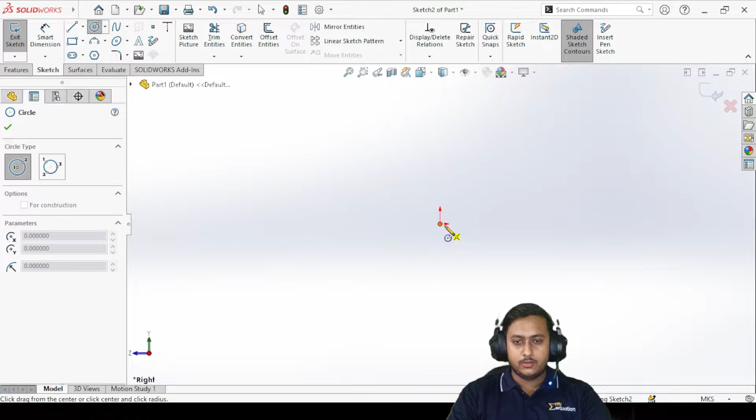So we can start from the right plane. And in this right plane, first of all, let's just start with the main axis for our crankshaft, the main shaft that is 0.035 radius, and over here we can just extrude it.

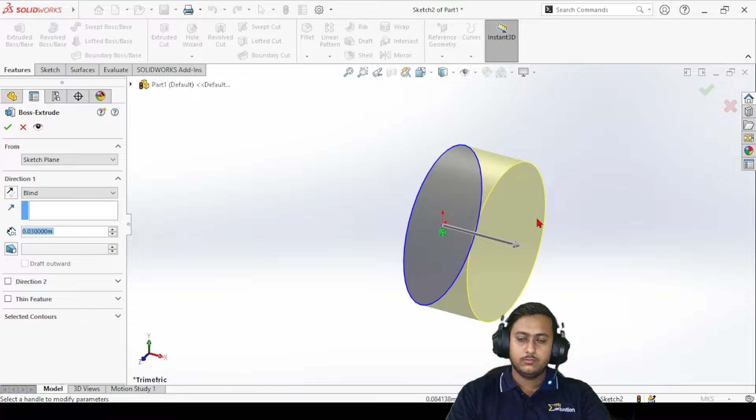I am using these dimensions because I've already calculated it according to the connecting rod which I made. Just go to your connecting rod and take dimensions from there, according to the connections between these two. So its thickness is something around 0.03. There you go, now you can just click on OK.

After this you can just start from here. Just see where the right plane is, yeah it's on this side. Actually in this image, now I'm just starting from this mid center, and I'm going to make this a right profile, and mirror it on the other side. As you can see, it is exactly similar to this side.

Instead of making all four of these separately, I'm just going to make these two, because these two are actually different, the smaller sides are on different sides on each side. That's why I'm going to make these two, and mirror them to the other side. So from here I'm starting.

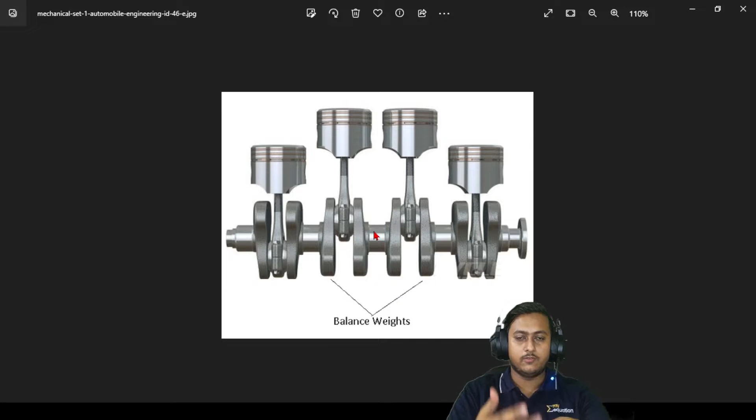You can start making it wherever you want, you can start from there as well. Just the point is, for mirroring you need a plane over here, so in that case you need to make a reference plane there. We're just avoiding that step, and we are actually starting to make it over here from here.

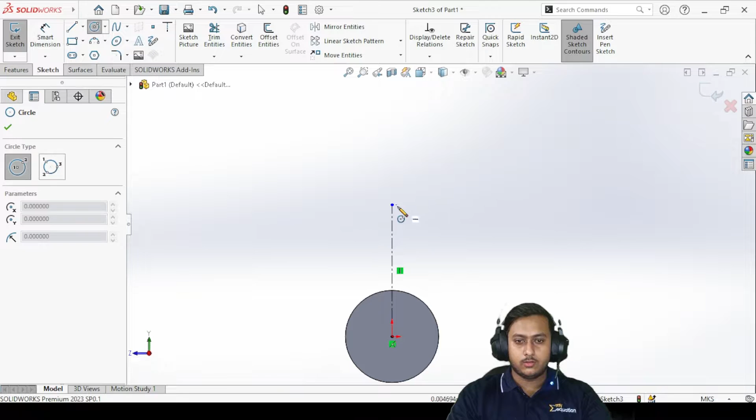So let's go back again, and let's start making on this face. First of all, I'm going to give a gap between these two of 0.1 meter, and over here I'm going to make a profile of similar radius, that is 0.035, just like that.

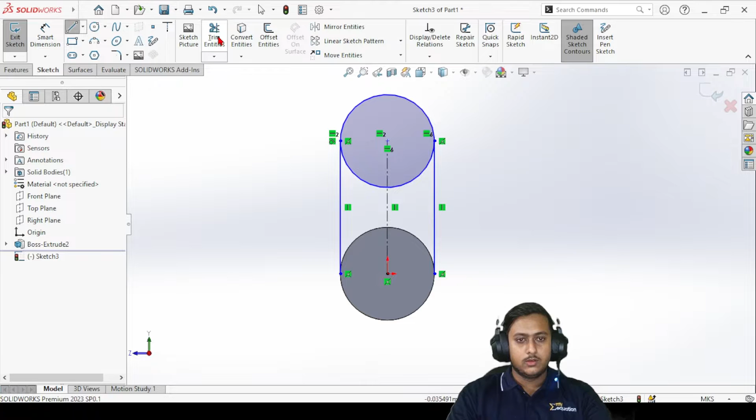Now I'm going to connect it with this bottom portion, like this. By using the trim feature I'm going to delete the middle portion which I don't want. For the balance weight I'm going to make some more profile over there, which actually helps the pistons to again move upwards. So let's just make that.

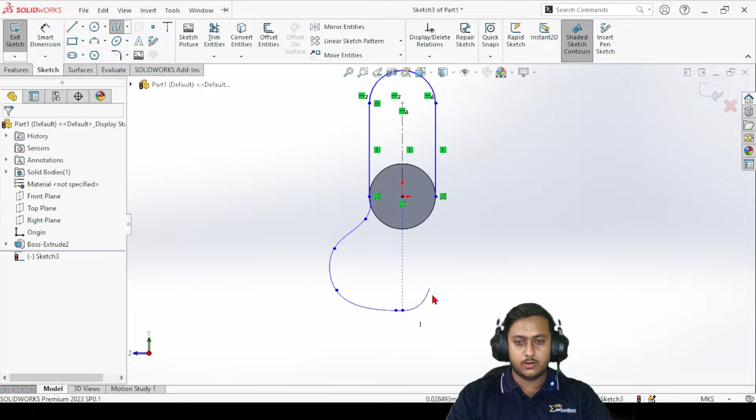We have an axis in the middle for mirroring it, so let's just choose a spline and start making it from here. Let's place a point somewhat around here, and let's drag this point a bit over here.

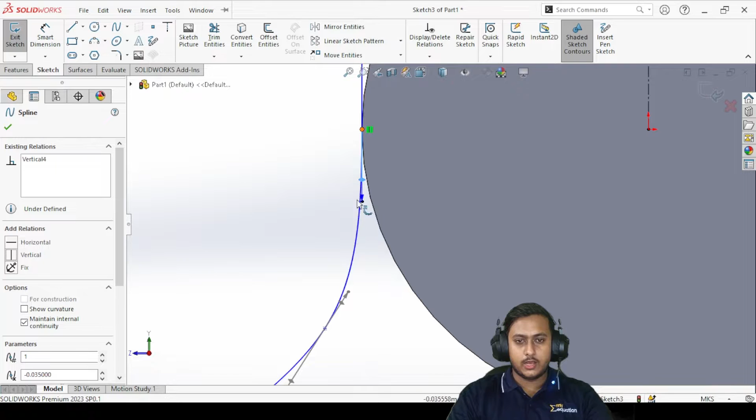You can define the gap between these two as well if you want to. Just click on this spline, and give this arrow as a horizontal constraint, and this one over here as a vertical constraint, so that it will just follow that line for some time. Now you can just adjust these points to get the exact curve which you want.

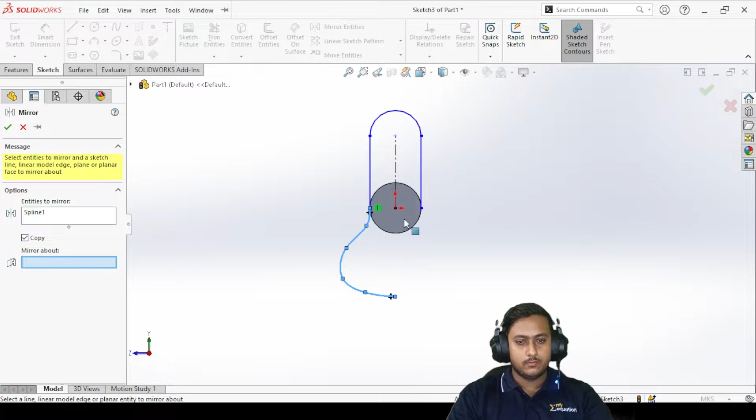For this geometry, you can take examples from many of the images given on the internet. Now I'm going to mirror it on the other side. Just choose mirror, choose this spline, and choose this axis for mirroring it. There you go, now we can just extrude it.

Let's go to extrude, and let's give it a thickness of, let's say, 0.04. Okay, there you go.

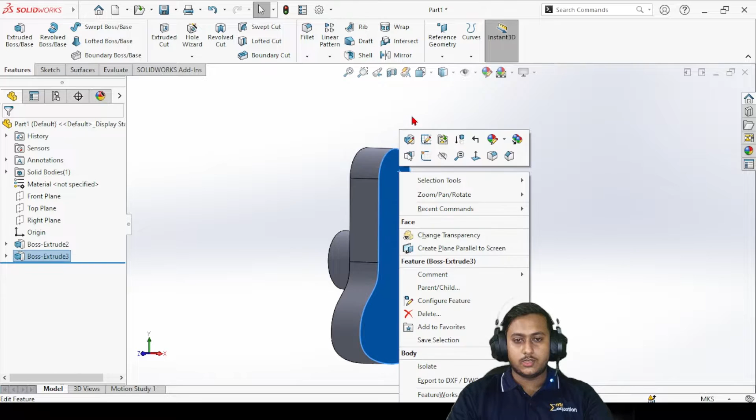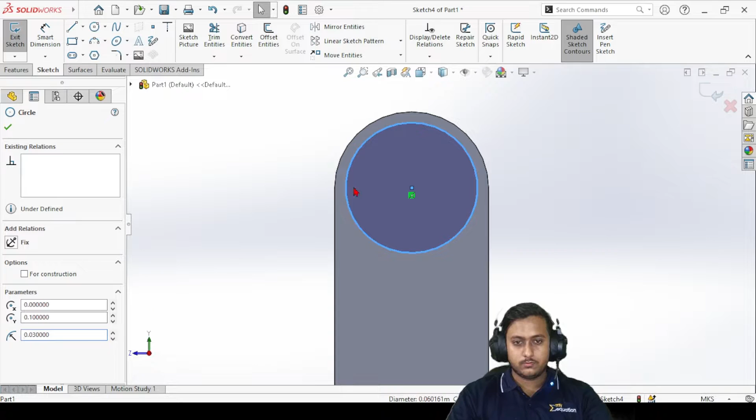With that, now let's just give a thickness over here, which is actually going to connect with that connecting rod. We have to make a shaft over there which connects with the connecting rod. So for that, let's make a circular profile on the top. Let's take reference from this center, and we want a radius of 0.03, and we are going to extrude it.

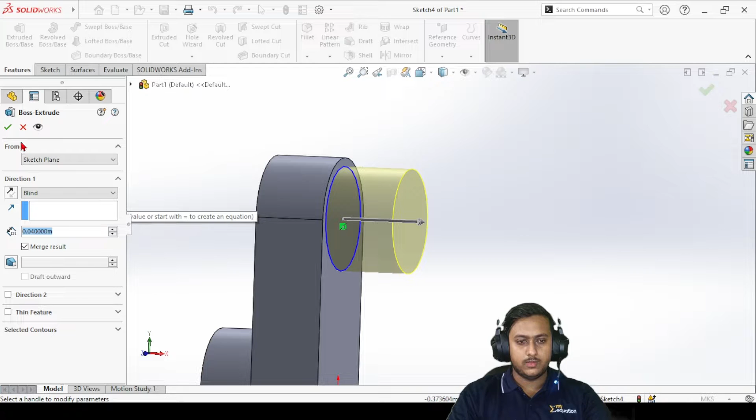We're going to extrude it as 0.02, or let's just increase it a bit. 0.04 would be enough, or maybe this is fine actually. What we are going to do, we are going to mirror the same thing on the other side to make the similar profile, right? Let's just do that.

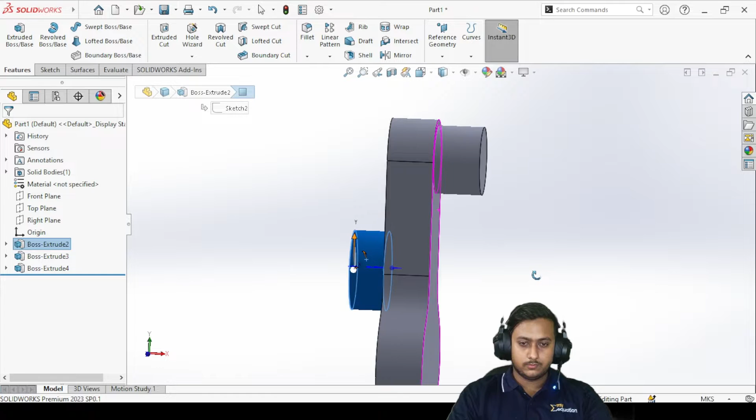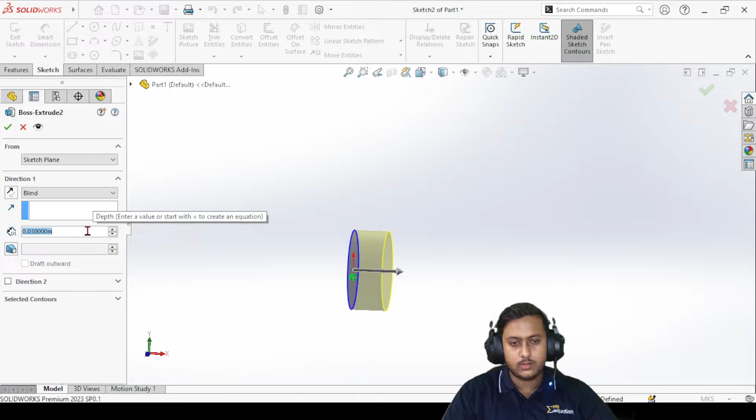Now what we are going to do, we are going to mirror this on the other side, exactly similar thing. Just click on mirror. For the mirror face, just choose this one, and in features, just choose this, this, and this. If I click on OK...

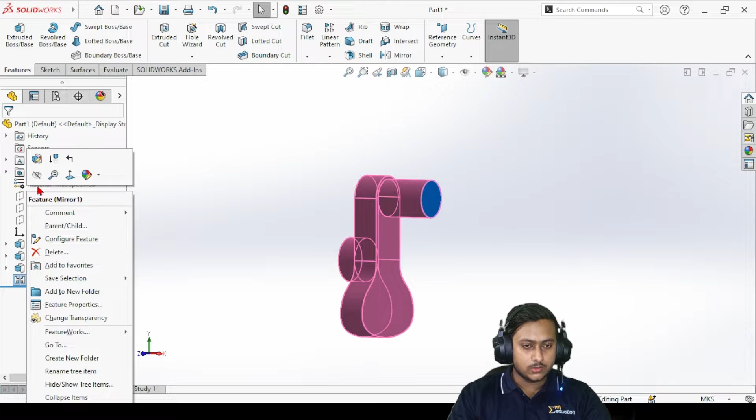Okay, some of the things are not made over there. Let me just see what is the issue. Let's just edit it. Okay, let's not make this one over here, and let's just delete this one. Let's do this one as well, and instead, first let's make this one. After that, or what we can do, let me just delete this mirror.

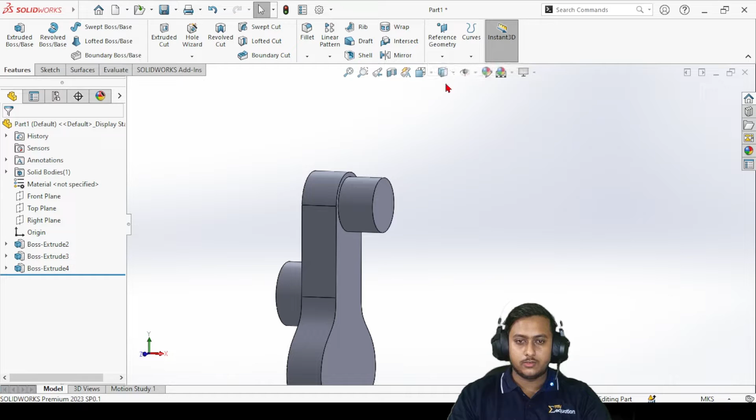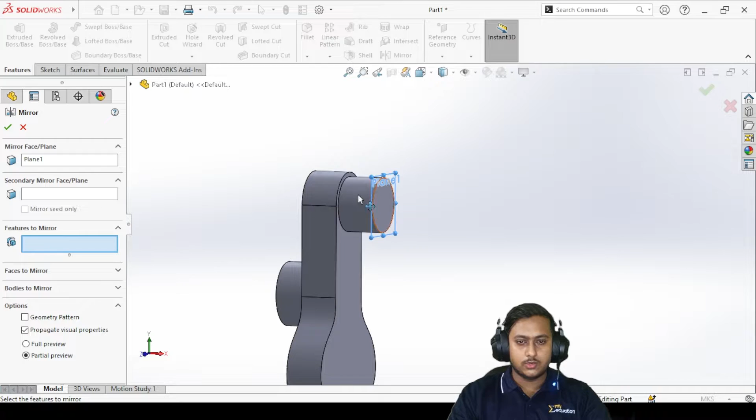Let's make a reference plane over there. With that, we can actually make it really simple and easy. Just click on over here, and let's just give a gap of 0, and there you go. Now we have a plane in between. Now you can just mirror it by giving reference to that plane. Just go to mirror, go to reference plane, and choose this object over here. In this feature, just choose this object, click on OK.

There you go. Now again go to mirror, choose this plane, select this body over here, not for the secondary mirror face. In the features tab, just choose this one, click on OK, and again for the last one, go to features, choose this one, and there you go.

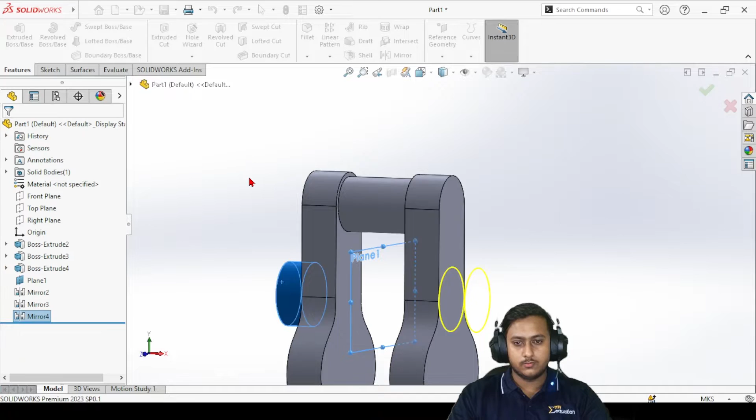Now we are going to make a similar cylindrical shaft on this side as well with the same thickness. What we are going to do, we are going to just flip this profile downwards, which gives it an inline manner of rotation for the piston, for the crankshaft.

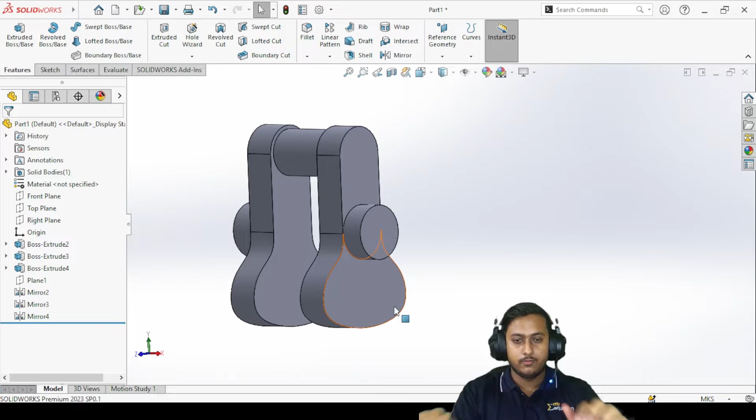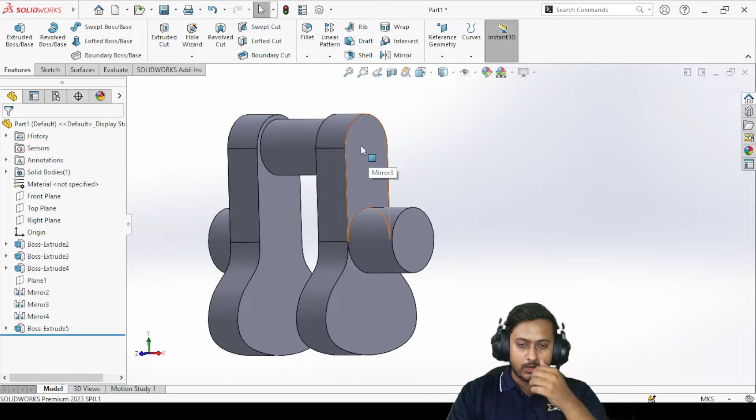So for that, let's just make this once more with the same thickness. Let's just extrude it, and this is 0.03. There you go. Now what we can do, we can just simply make this profile, but we have to flip it downwards.

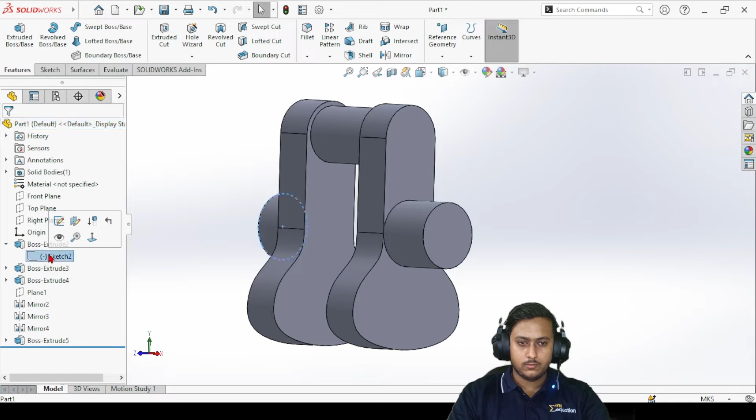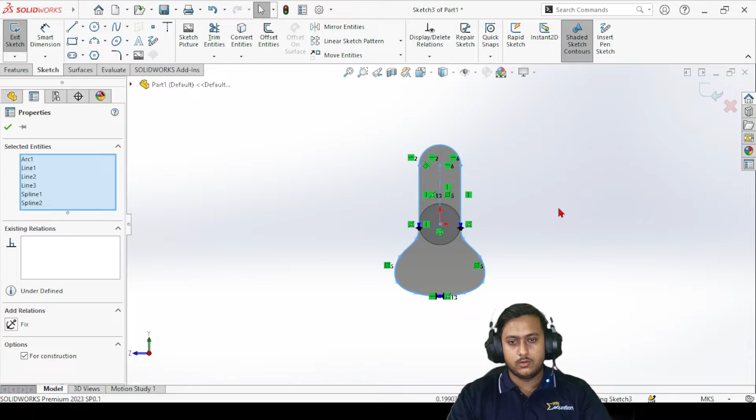To get a similar copy of it, what you can do, you can actually copy that sketch from the previous one which you made. You can just go over there. Okay, this is the circle, this is the profile which you made. You can just select the sketch over here, click Control C. You have to go to that sketch actually, just go on that sketch, select your sketch completely, click on Control C, click on OK, exit the sketch.

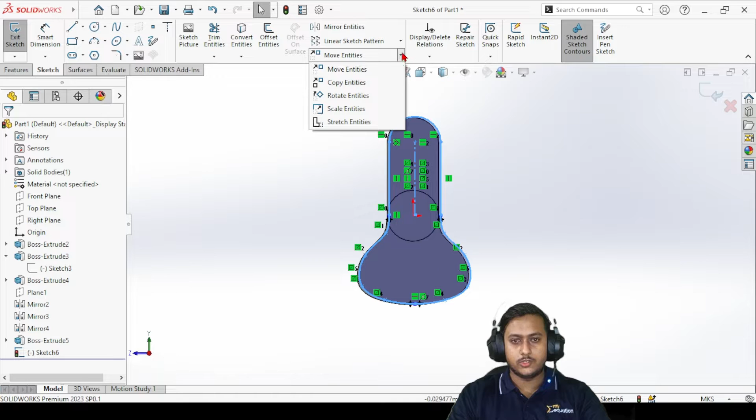Now what you can do, you can just simply come over here, go to sketch, and just press Control V. There you go. Now you can just rotate it. The whole sketch is already selected. Just go to this drop down section and move, then click on rotate. For the center of rotation, just select this middle point over here, and just give an angle of 180 degrees. Just like that, click on OK.

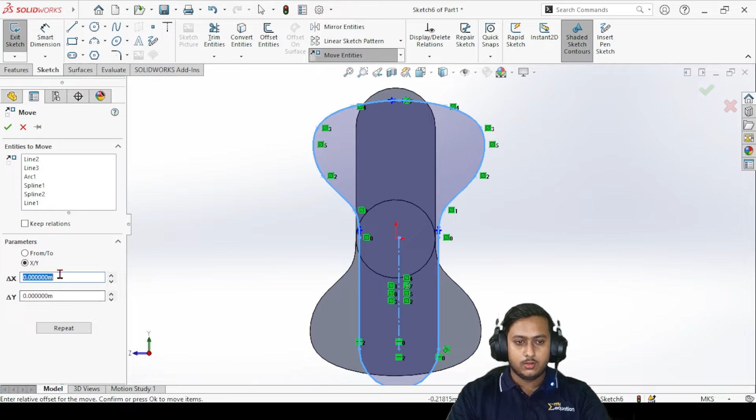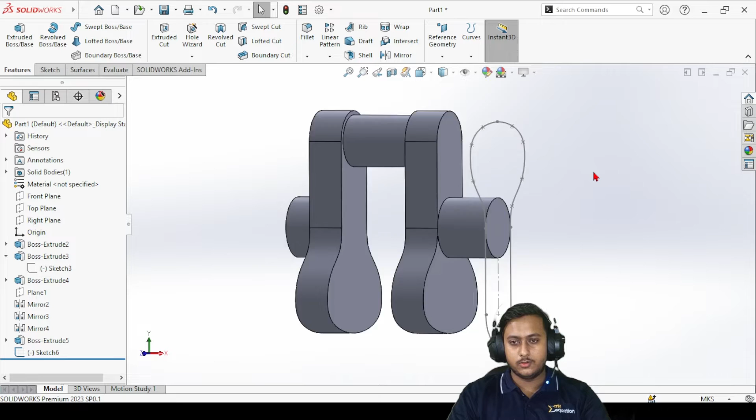Select the whole sketch again and go to move, click on from-to, and from the starting point just select the midpoint from there and just drag it over here in the middle. Just like that. Now if I click on OK, you can see you have the similar kind of sketch but horizontally flipped downwards. Just again go back to the sketch and just extrude it with the similar thickness as 0.04. Click on OK, there you go.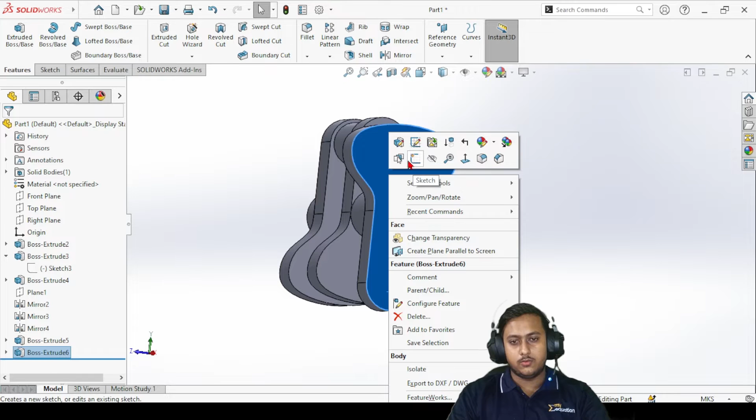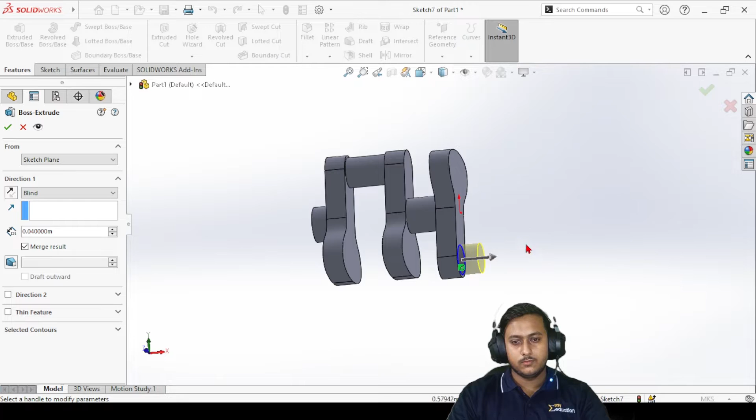Now you have to make a circle over there. So for that, just go to sketch again, choose circle and make a circle over here. Give it a radius of 0.03. Click on OK, just extrude it, again for like 0.04 meters. Yes, just click on OK.

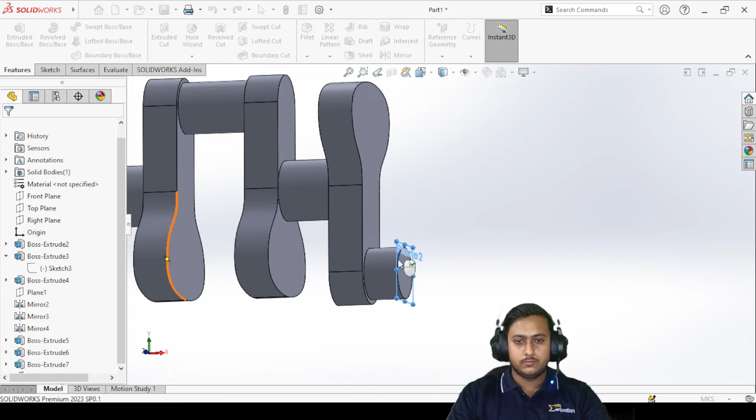There you go. Now what you can do, you can just again give a reference plane over here and just mirror these same things on the other side. So for that, let me just go back to this reference plane. Let's choose the surface and let's give a gap of 0. Click on OK, there you have this reference plane. Now just go to mirror, choose the reference plane. In feature, select this geometry, click on OK. Again choose this plane, go to mirror, and in this features tab, let's choose this geometry which you made and this one over here.

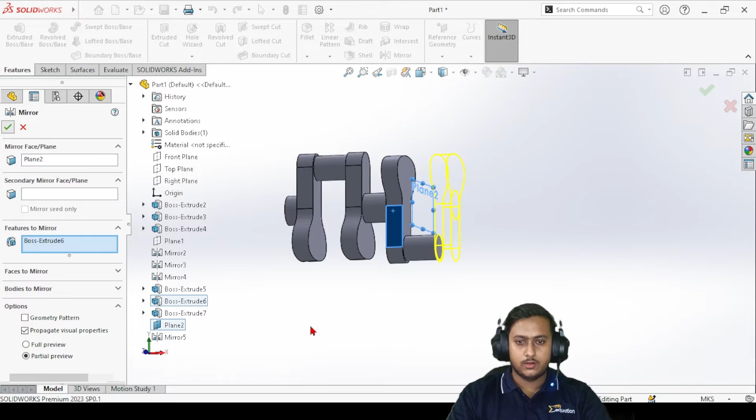But instead of selecting the whole thing, you can just simply select this part over here, or let's just avoid this. You can make that afterwards, like that. Now what you can do, you can just simply click over here, go to sketch and just select the surface, click on convert.

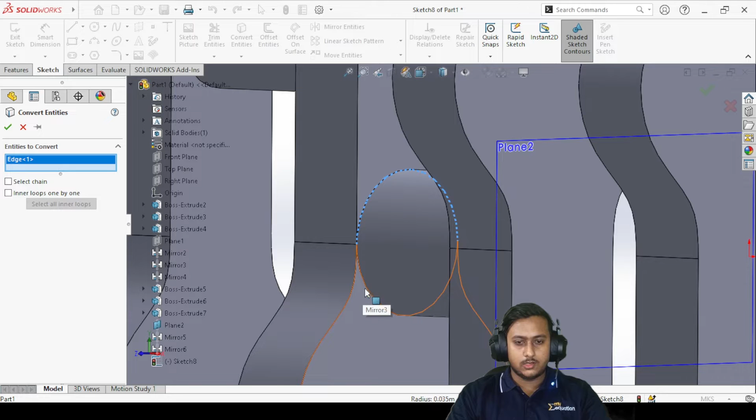Okay, just select this edge. Try selecting this edge and now just click on convert, and there you go. Now just click on extrude and you have this thing over here. Just give it the same thickness as 0.03.

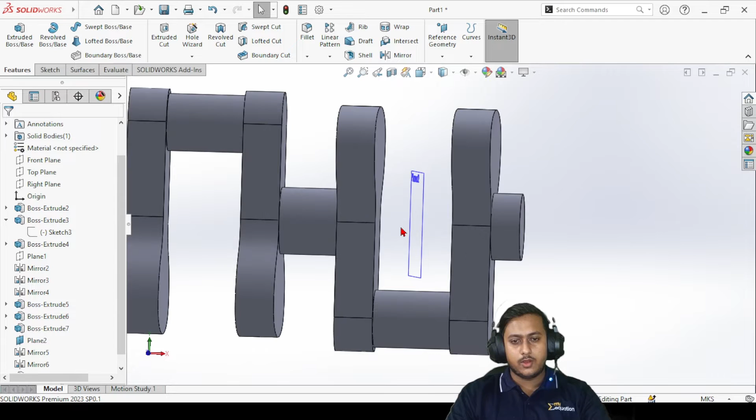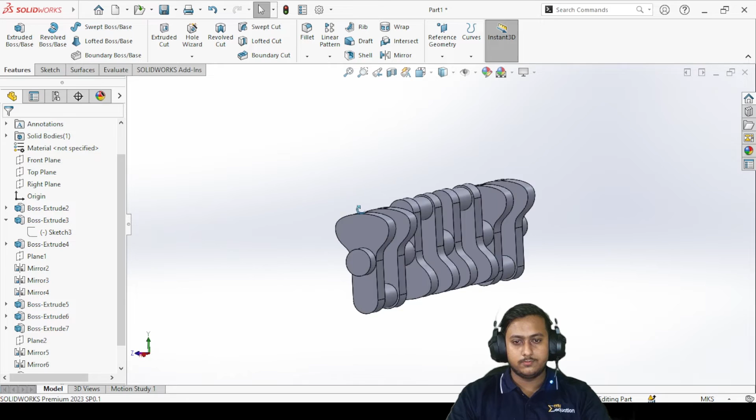And there you go. Right, now you have this whole geometry ready on this side. Now you just have to mirror it on the other side, right? We already have a reference plane over there, which is this right plane. Just select it and click on mirror, go to bodies to mirror, and just select this whole body. Click OK. There you go, you have this crankshaft ready.

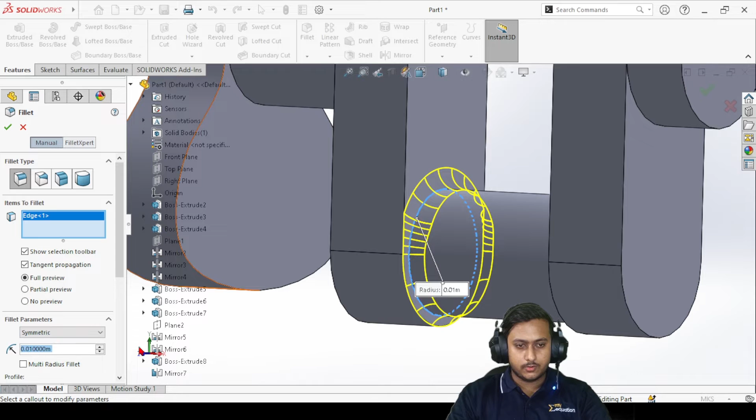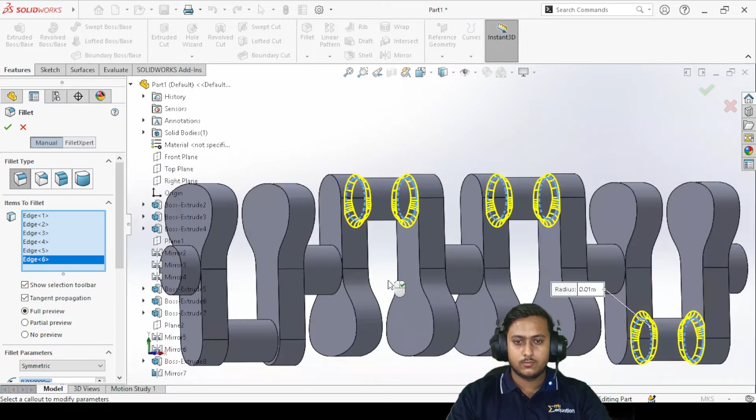Now you can just give it some fillet for smooth edges. Let's go to fillet and apply them one by one. I want to apply a fillet over here of a radius of 0.01. Yeah, this is fine. Let's just select all these edges, just like that.

You can click on OK. Now if you want to add some more fillets to it, you can, but basically afterwards in the other sessions which are going to come up, we are going to edit this crankshaft according to the need for the whole engine assembly. So right now I'm just keeping it over here, and if you want you can add more detailing into it, up to you.

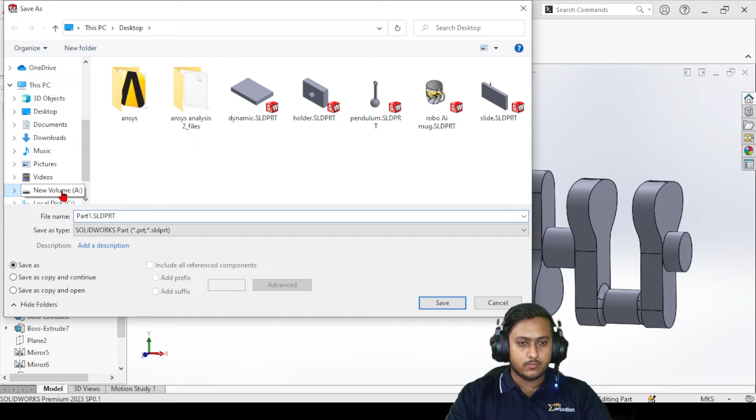But for a simple attachment to the cylinder connecting rod, it's fine. Let's just keep it over here and save it. Let's save it in our folder over there, just save it as cylinder crankshaft. Okay, now we are done with this crankshaft.

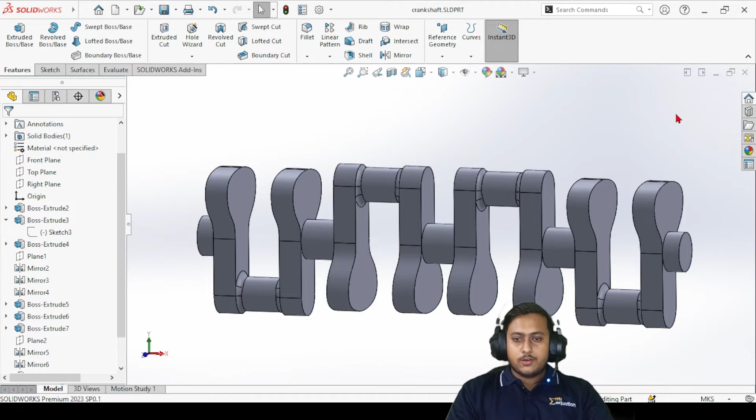Now let me just show you the assembly because we have some time left. Let's go to assembly and let me show you how these things work. As you open assembly, first of all it will ask you to import some models, because without some pre-designed parts you cannot assemble something. To assemble something you must have at least two parts.

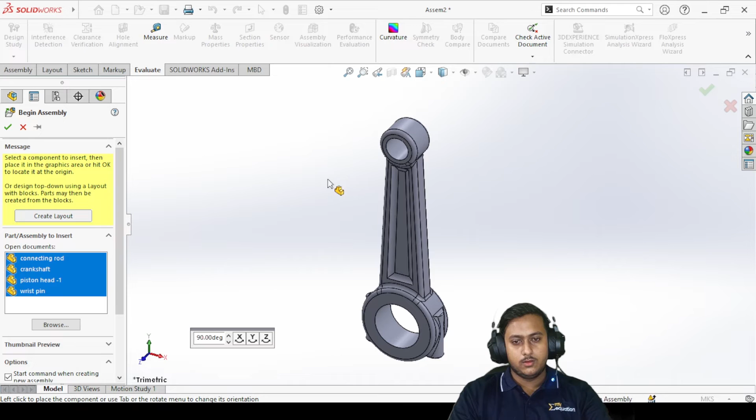So for that let's just import all these, one by one, just like that. As you can see, one more important thing in this assembly is a feature called fix and float. If you right click on any of these parts, you can see we have fix, and if I click on the first part I've imported, which is this connecting rod, I have float, which shows that the body you selected is currently in fixed condition. If you want to change it, you can choose the float button to make it float in your workspace.

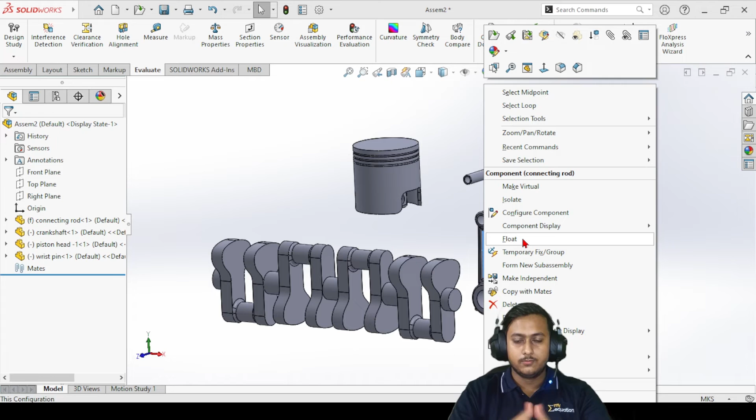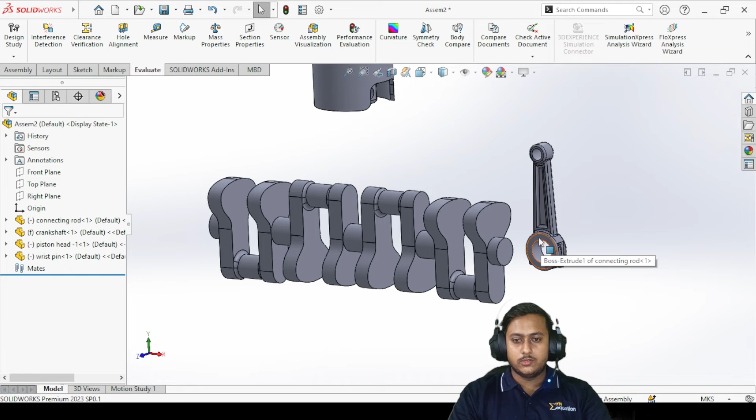Let me just show you. If I try to move this piston, I can move it around these parts. But if I try to move this connecting rod, I'm not able to, because it is in fixed condition right now. I can move this one as well, it's in floating condition. So right now I want to make this crankshaft fixed, and let's make this one floating. Now I can move this, as you can see.

So this is the basic interface of the assembly feature in SolidWorks. Over here we have mate and insert components. If you want to insert some more components like these, and connect them with each other, you have to use this mate feature. This is the most useful feature in assembly.

If I click on it, it has some basic features like coincident, parallel, perpendicular, tangent, concentric, and lock mate. These are some pretty familiar names, we're already familiar with all these constraints. Coincident is just connecting two different things with each other, there is a connecting point between them. Parallel, two lines are parallel to each other, they won't intersect at any point. Perpendicular is basically when two faces have a 90-degree angle between them.

Now tangent, a straight line connecting to the outer edge of a circular face or circular edge. Concentric, if two circular faces or edges have the same center, that is concentric. Lock, you just want to lock two different things with each other in whichever condition they are, they will be locked in that condition forever, that is lock mate. This is simple distance and angle mate, if you want to specify a certain distance or angle between two faces or edges, you can use those two tools.

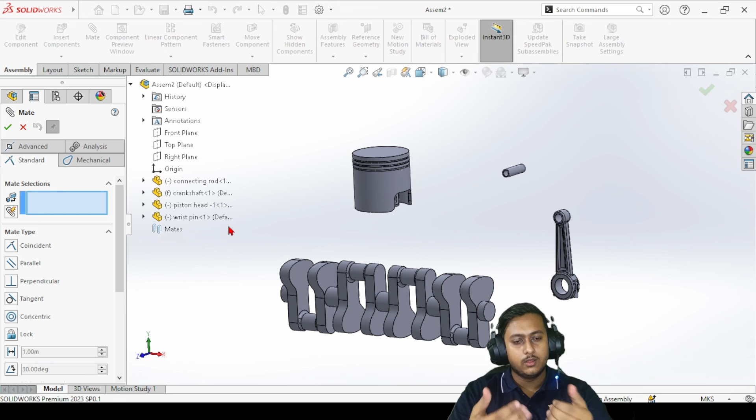So it's pretty simple. Now let me just close this and let's explore this assembly in the next video.